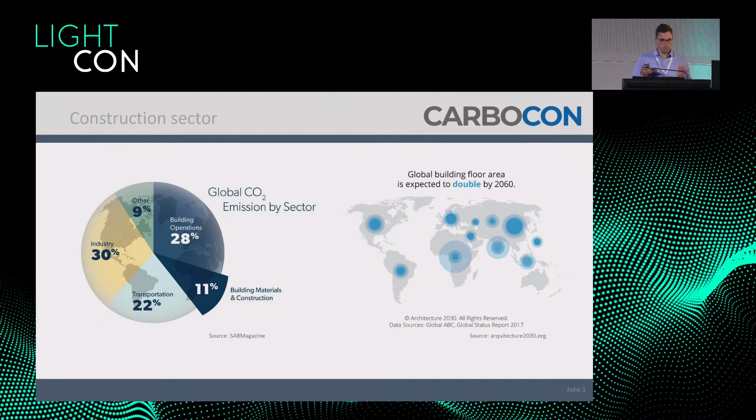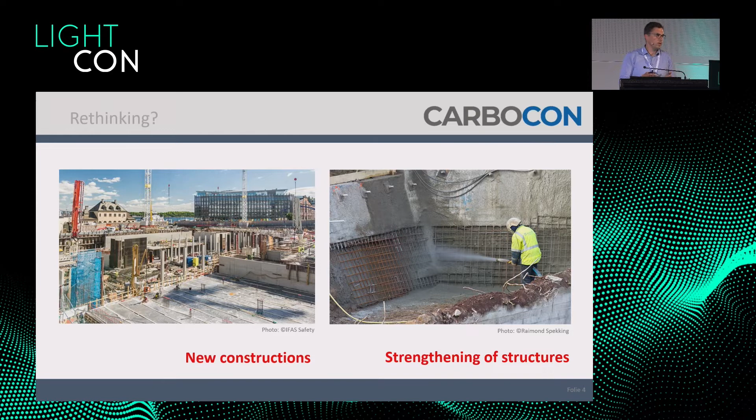The slide before I showed you - we already know this not just from 2 or 3 years ago, we knew it 10 years before. But what had we changed? If we look to the working places outside, I will say not really much had changed in the building sector. So is there really a rethinking in the field of building sectors?

So we already know we have to use our buildings and infrastructures in the future, but we are not changing the process to strengthen or retrofit these structures. This is also the same for the field of bridges. We have some problems, but we have to strengthen them with modern materials to achieve better material safety.

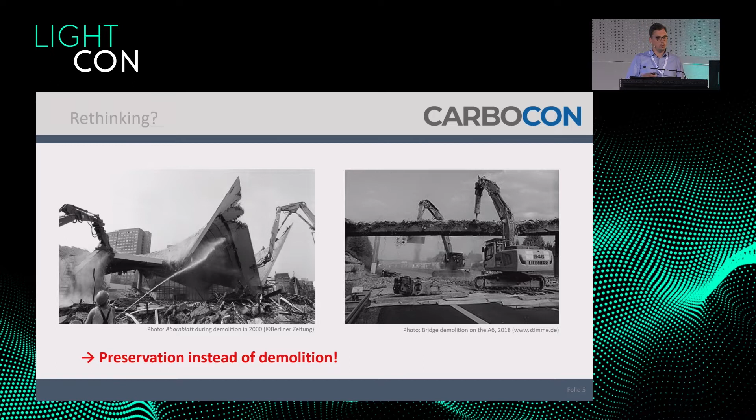So now we already know we have to change something, but here you can see how we do it at the moment. On the right side, you can see a column strengthened with shotcrete or steel reinforcement. We put this on an existing structure or column which has been there for 20, 30, 40 years - we put a lot of material on the side to keep using the column for the next 30, 40 years. So we end up with much more material and a high dead load.

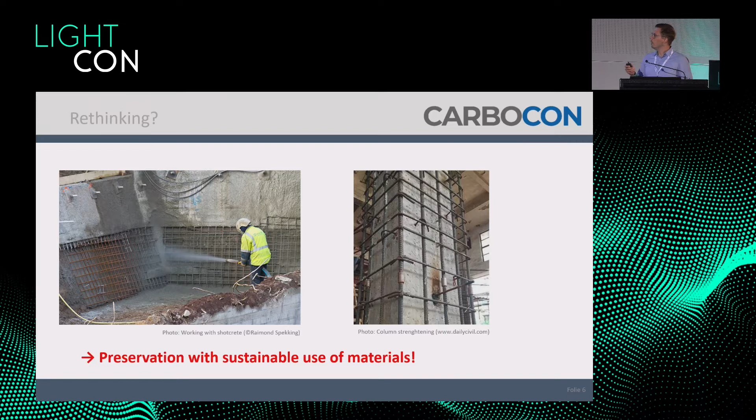But why aren't we using newer materials which are more sustainable and durable? Because in Germany we have a large problem in the building sector - we have a high standard. That means we build and design according to standards and guidelines. This is really good because then we have no problems like in Genoa 3 years ago with the bridge. But it's not possible to design and build with materials which are innovative and sustainable, because we have no approval - it's not allowed to build with this.

And that's the largest problem for us, that we hold ourselves back - it's possible, but we say we cannot use it. So we have a lack of standards for these new materials. To use these materials, you need an application or an approval to use this material, and that approval is often only for one project. So if we have an approval, we can mostly use it only for this one building, not for a building in another city. That's not allowed. That's our problem in Germany - we have this high standard.

We have an approval for strengthening existing structures with carbon reinforced concrete. I want to show it to you on the next slide. With this approval, you can strengthen structures in the whole of Germany. That's good, but we need more of these approvals in Germany, and we are not fast enough.

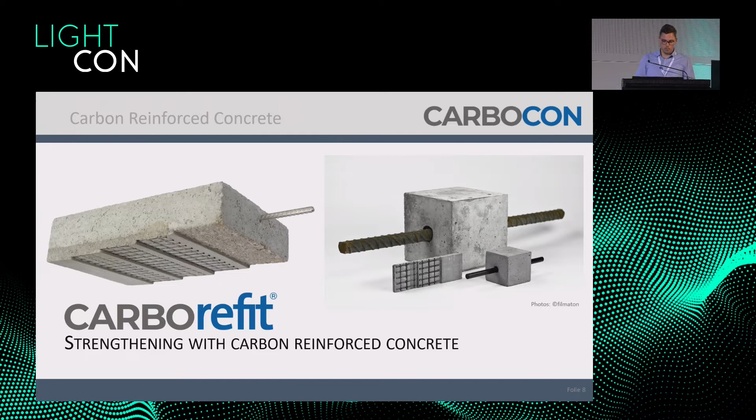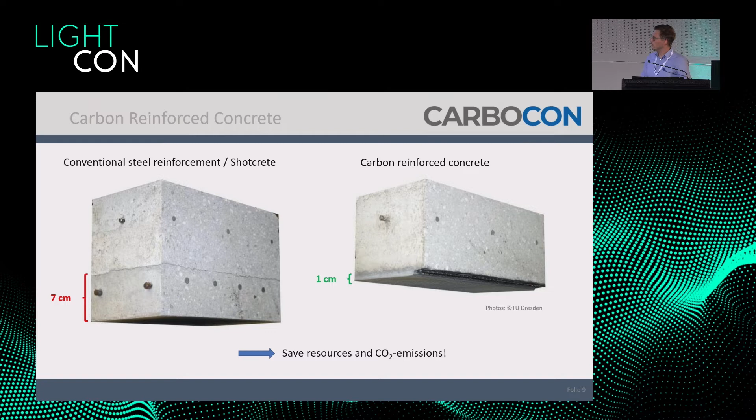With carbon reinforced concrete, it is possible to strengthen the structures with only 1 centimeter. So you need not so much material, the dead load is not too high, and the carbon footprint is also really low. So, let's say we can save resources and CO2 emissions.

And it's proved, that we did it in the last time. I don't know how many people here already know about carbon reinforced concrete, but we did it in nearly every state of Germany in the last years. So it's proved and it's shown that it's possible, but the standards sometimes say it's not okay to build so fast as we want to do.

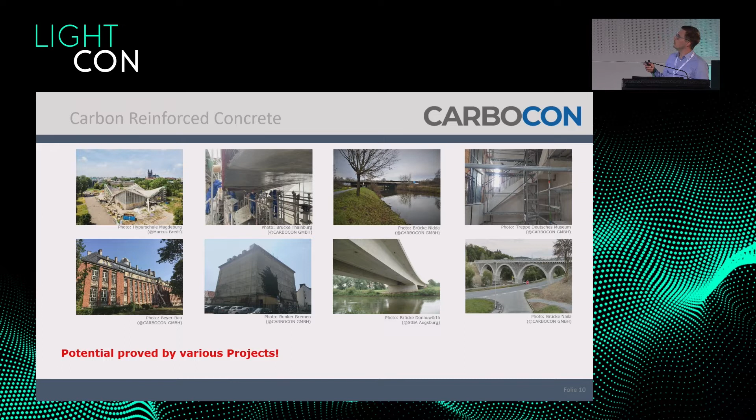I want to show you only some pictures of the existing structures we did. Maybe someone of you knows one.

One famous bridge is a footbridge in Naumburg. It's from 1894, one of the oldest bridges in the new federal states of Germany, with a span of 50 meters and a depth of 1.5 meters. The arch construction is 50 centimeters thin, so it's really a thin structure.

It has a whole load capacity from our building culture that our grandfathers built more than 120 years ago. At the moment, we as civil engineers cannot build such a structure because our standards say it's not possible, so we have to think about it.

For that bridge, we did strengthening. The bridge is a listed monument, so it was not possible to demolish it and build it new. We strengthened the structure on the bottom with 9 millimeters and on the top with 6 millimeters of carbon reinforced concrete, so it's nearly nothing.

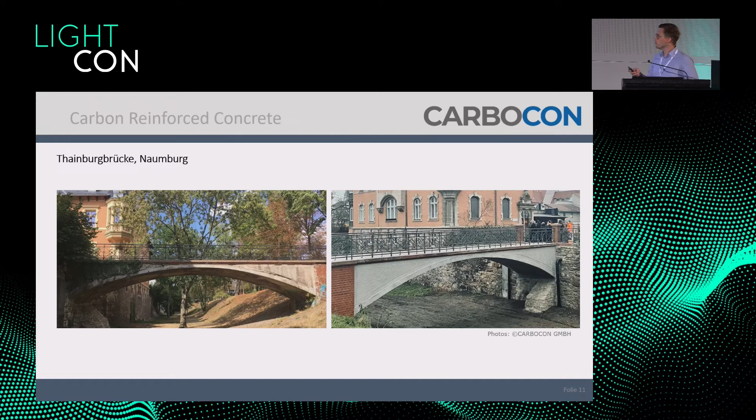Another really famous building is in Magdeburg, the Hyparschale from Ulrich Müther. It's from 1969, also a listed monument, with a span of 50 by 50 meters. There is no column inside, so it's one of the largest shell structures in Germany or in Europe. It's really famous, and it shows our building culture, what we can do if we want.

At the moment, it's not possible under the standards, and I think also we have no workers who can do it. Is it really economic? But that's another story.

The shell structure is 7 centimeters thin, 50 by 50 meters, and there was not enough reinforcement inside. With shotcrete, you have to put 7 centimeters on the top and on the bottom, so the dead load would be 3 times higher than the dead load that's there at the moment. So it was not possible, and it had to break down.

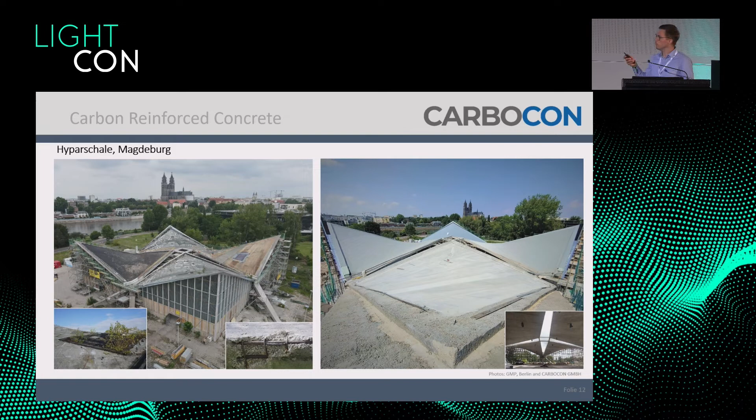Another opportunity was demolition and building it new, but it was too expensive. So our goal was then to strengthen the structure with carbon reinforced concrete. You can see on the right side that we can save material.

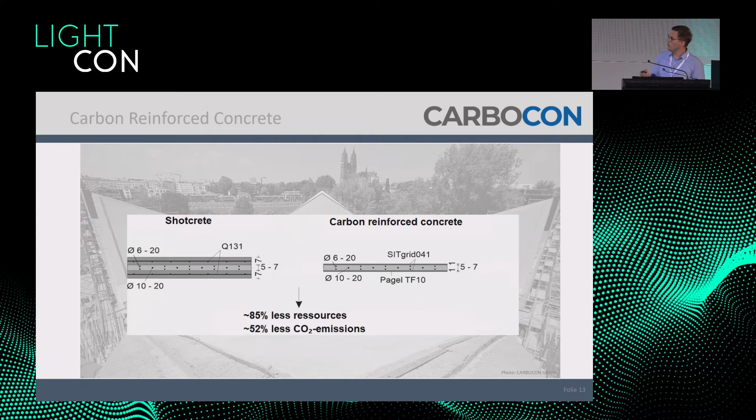You can see here on this slide, these values are already published. On the left side, this was the opportunity with steel reinforcement or shotcrete, 3 times higher dead load. On the right side, you can see the structure with only 1 centimeter on the top and bottom. So it was possible to save around 80% of resources and 50% of CO2 emissions.

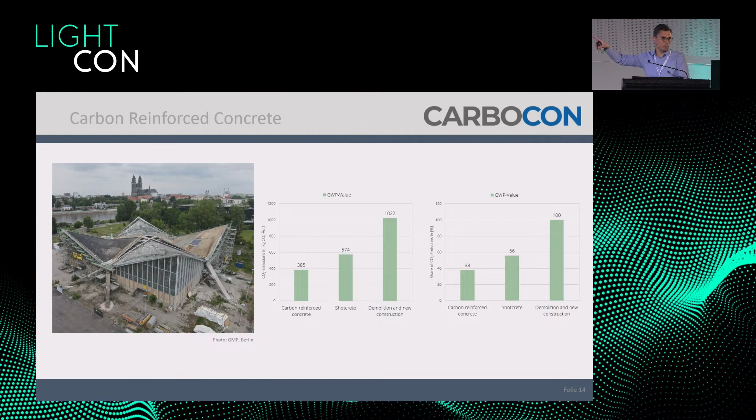These values are also published, and what I want to show you on the right side: with demolition and building new, we have 100% emissions, but if we can save our existing structures using carbon reinforced concrete, it is possible to save 60% of CO2 emissions. You can also see that we can save more than 90% of resources.

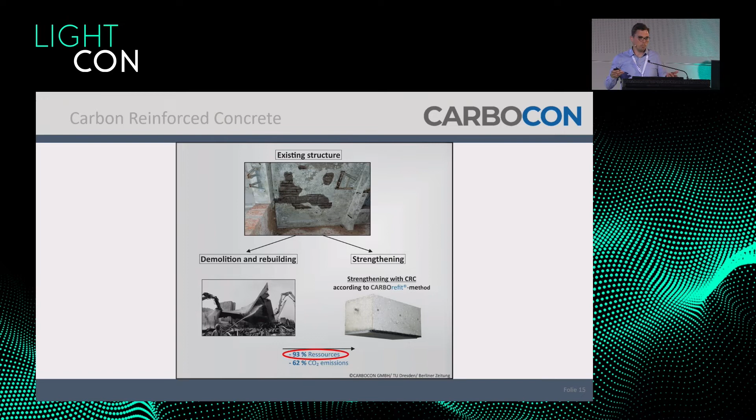That's a really big problem at the moment in the building sector, that we have not enough sand. We cannot use the sand from the Sahara. So maybe in 20 years, we cannot build anymore. So we have to think over what we are doing then.

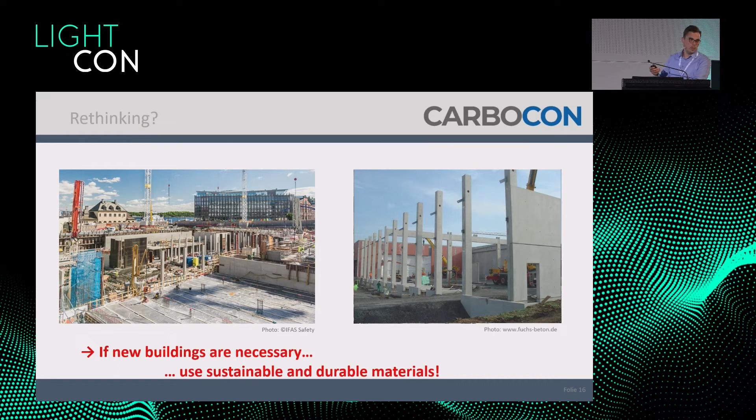Yeah, but what can we do? Of course, not every structure can be strengthened. We have to build something new sometimes. That's okay, and I think that's also the future. But then we have to use sustainable and durable materials, not ones that can corrode and have a lifespan of around 20 or 30 years. So if we use carbon reinforced concrete, it is also possible to save materials.

So we know already the lifespan is much longer. At the moment we say 200 years. Normal steel reinforced concrete has around 50 years. So we can save 3 or 4 bridges or structures in this time.

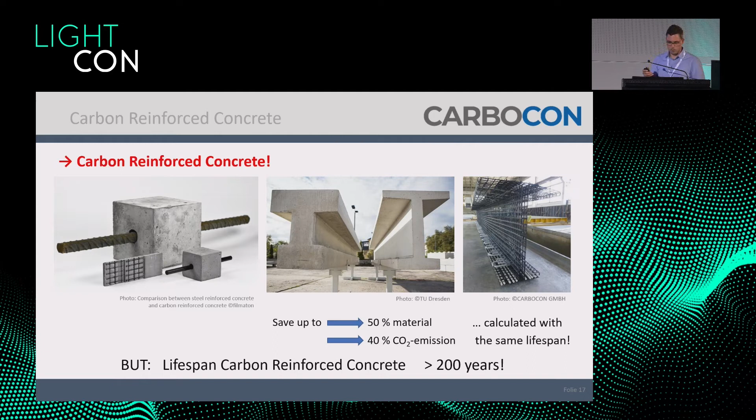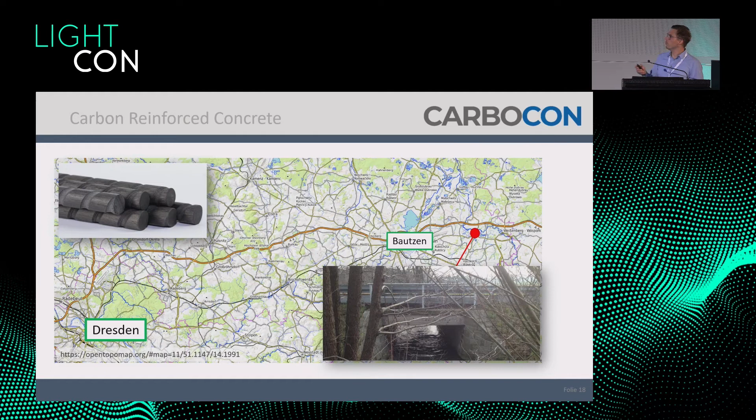And we did it already in East Germany, in Saxonia near Bautzen. We built the first bridge made of carbon reinforced concrete. There's nothing steel inside, and it's really the first bridge only with carbon rebars. You can see that on the left side.

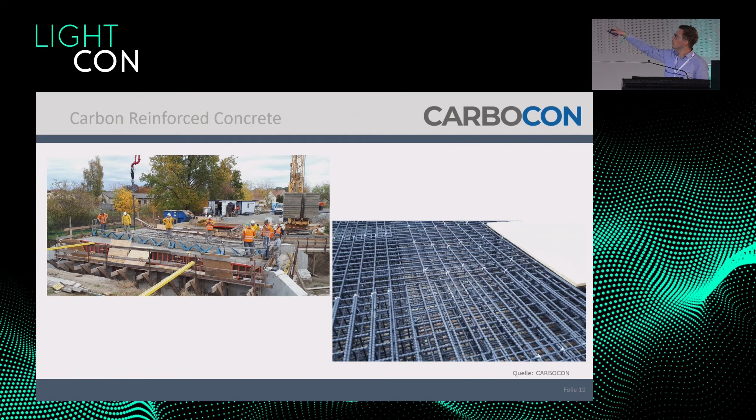And after concreting and some tests they had to do, the bridge is now being used by normal traffic. The proved lifespan for this bridge is 200 years, a normal bridge around 50 to 60 years, so not so long.

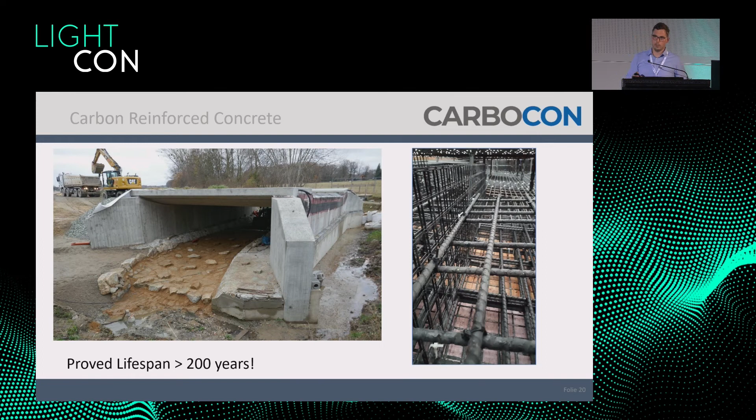And at the end, I want to say thank you, and that we have to use our buildings, our infrastructures, and have to strengthen them, but with sustainable and durable materials. Yeah, thanks for your attention.

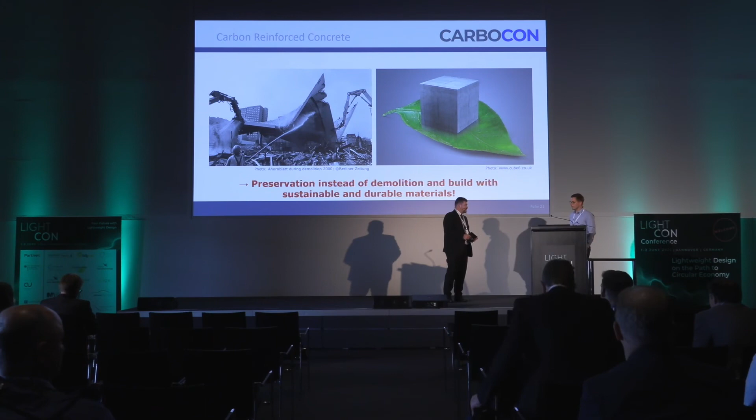You talked about carbon reinforced concrete. I'm also from this sector, and I would say it could be a game changer in the building sector. But could you tell us something about the limits of the material, for example?

For the material by themselves, we have no real problems in the field of the building sector. The carbon reinforcement has a high strength, about 3,000 to 3,500 Newton per square millimeter, and it's not corroding. So we can build it as we want, and there's no problem with the position from the outside. At the bridge in the end, we had only a concrete cover of 1.5 centimeters. With steel reinforced concrete, you need 5 to 6 centimeters, so much more.

Our problem at the moment is that we have no standard, no guideline that allows a normal civil engineer to plan and design such structures. That is the problem, that we have too high standards that prevent a new material from being placed in a bridge or a structure.